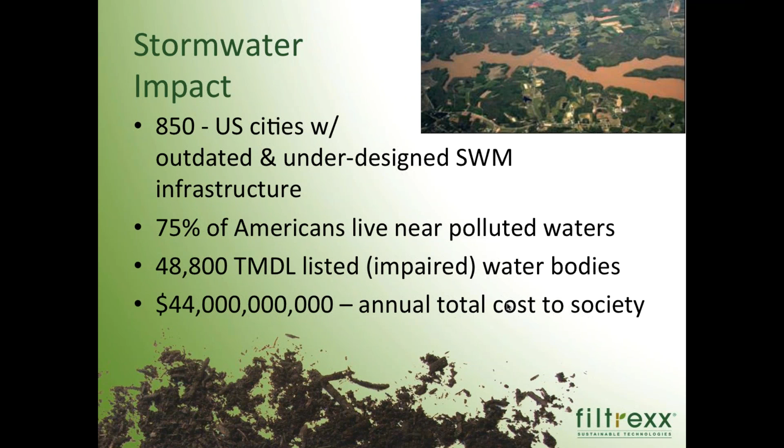According to the U.S. EPA, about 3/4 of all Americans live near a polluted surface water body. If we were to get on their impaired water body list that they maintain on their website, the U.S. EPA, for TMDLs, or total maximum daily load designated water bodies, we'd see that we're actually approaching about 50,000 water body segments distributed across the United States right now. And another study has said that if we were to add up what we pay as a society to clean up our water due to poor or ineffective stormwater management, we pay about $44 billion per year.

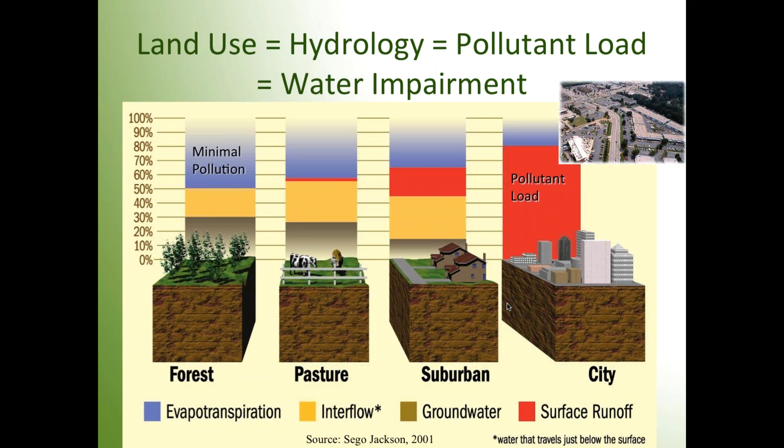And what happens is when we reduce each one of those natural systems in the natural hydrologic cycle, we have more and more surface runoff, and when we have more surface runoff, it carries a lot of pollutants along with it, and you see that here in the graphic. So you can look at the red as more stormwater in these developed watersheds. You can also look at them as more pollution as well, because they are inextricably linked when we have more impervious surface in the watershed.

As I mentioned, the U.S. EPA says that about 3/4 of all Americans live near a polluted water body. If you were to take a deeper dive and a closer look at what they have on their website, these are the top pollutants that they have listed: coliform bacteria, a range of metals. This is copper, cadmium, chromium, nickel, lead, and zinc. Generally, we find most of these coming from our building structures and our roads and parking lots and highways, mostly coming from transportation sectors.

Nutrients, nitrogen and phosphorus, so mostly macronutrients. Fine sediments, the ones that really stay in suspension once they get into a water column, that lead to high turbidity and suspended solids. These are going to be your clays or your fine sediments. And then last but not least, petroleum hydrocarbons. So not only are these the top pollutants that we see listed for impaired water bodies, they're also the top pollutants that we find in our urban and suburban runoff as well.

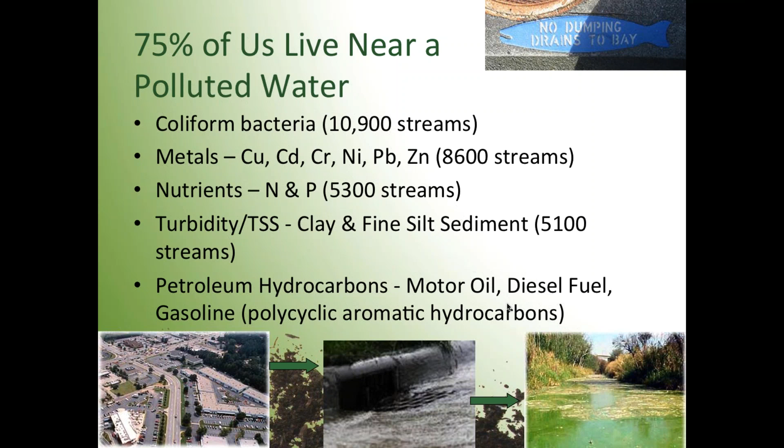So no surprise there that what we find, the pollutants in our stormwater, are the very top pollutants that we find polluting our water bodies. If we look at some of these source areas to figure out where the problem areas are and really what we need to target, as I already mentioned, a lot of the metals are coming from parking lots, highways, streets, and rooftops. We also get a lot of hydrocarbons coming from the same areas minus the rooftops.

Golf courses and lawns are actually the leading sources of nutrients getting into our water bodies, and pet parks, believe it or not, are one of the leading, if not the leading, source of fecal coliform contamination in our urban and suburban areas, stormwater originating from those areas.

Who cares the most, or who's really paying a lot of attention to this? So anybody that has a National Pollutant Discharge Elimination System stormwater permit, okay, that could be a land disturbing activity or a construction site. For most areas in the country, that's anywhere that's disturbing 1 acre or greater, they must have a stormwater permit. Now, generally, they're only targeting sediment in those applications and not some of the other pollutants that I mentioned.

But industrial stormwater permit holders and MS4s, or municipal separate storm sewer system permit holders, often do have to target not only sediment, but also a lot of the other pollutants that I mentioned earlier. And all of these entities, it's very possible, depending on their SIC code and the size of their municipality, that they may have a stormwater permit.

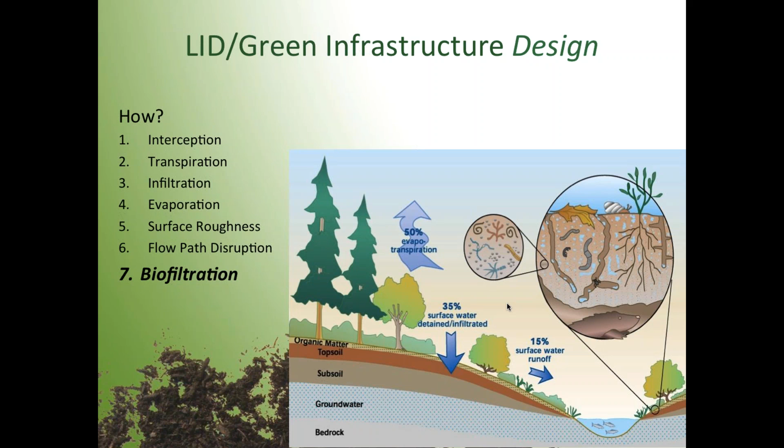We know in land disturbance and through urbanization that surface water runoff number, which is quite low in the graphic here because it's a natural environment, is going to be much higher, and there's going to be pollutants associated with it. So if we can get that natural biofiltration behavior and processes in that flow path, we're not only mimicking nature, but we're actually getting that high performance process in the areas that need it most.

Going a little bit farther into the type of media that we use here. So at Filtrexx, we use compost for all of the products and practices and technologies that we use and develop. I'm going to show you a list here of all the different best management practices that we use in stormwater management, but they all use one of two types of compost. The first one is what we call a filter media, sometimes a biofiltration media. It's specifically designed for optimum filtration of pollutants and also hydraulic flow or passive flow of water through the system.

We don't want to create a dam. We don't want to create an obstruction. We're not relying on just flow restriction and sediment deposition here in order to improve water quality. That's what a straw wattle and a silt fence does. We actually want water to passively move through these systems and filter it. Now, we are restricting flow to a degree because we are putting something in the flow path. Remember that from the LID design, but we are relying on filtration mechanisms as well.

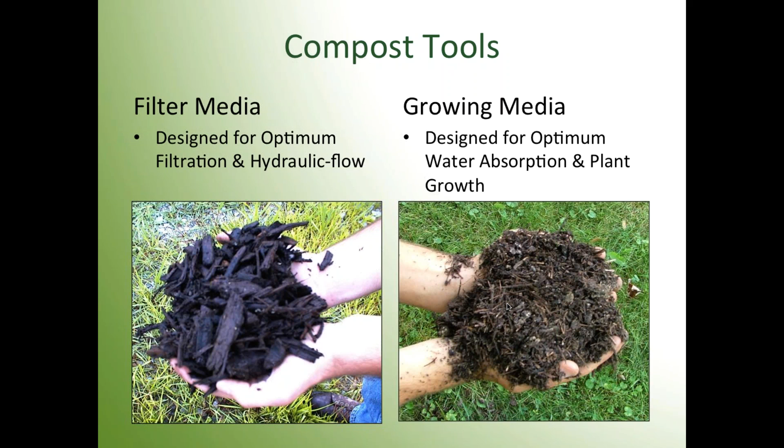So all of these use the filter media. Okay, it's that very coarse media, and you can see a variety of the applications where we're using it, from sediment control to check dam applications, slope interruption devices, sediment traps. We also use this media in bioretention systems and biofiltration systems where we're looking at combining vegetation as well. As an example, if you look at the lower right-hand corner, this is a designed biofiltration system to filter pollutants coming off of a large parking lot.

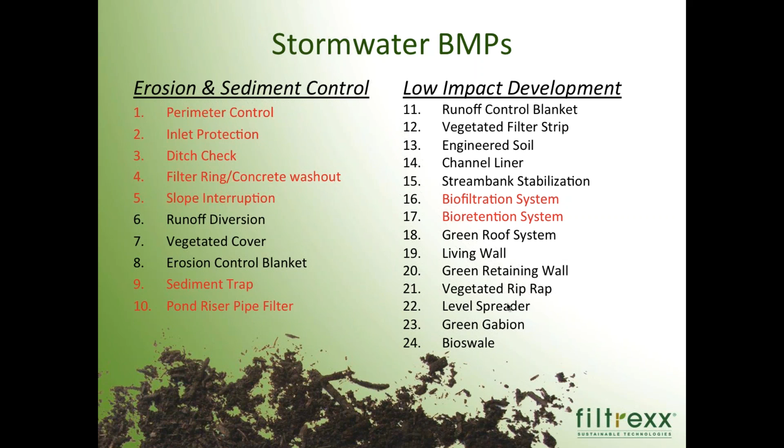I don't spend a lot of time talking about the sock specifications because this is really something you can dig into outside of the webinar. If you've seen our specifications or you're familiar with them, they actually are very detail oriented. If you compare them to other manufacturers or vendors that have specifications on their practices or their technology and their product, you'll notice that ours are extremely long, and that's actually by design.

We look at our specifications also as an educational opportunity, because we realize for a lot of folks, they may be coming to our systems for the first time, or they're trying to understand how it works or why it works or where it works, or what the limitations are, maybe what the inherent advantages are. So it's almost like a one-stop shop of how you use these things and where, just to have a greater understanding, because oftentimes when folks are specifying or engineering or designing with our products, we don't have the opportunity to engage them in a webinar like this, or to have an educational opportunity. So we take that advantage, and then we also have a summarized version as well.

But a couple of the key elements that really make these unique are the different size diameters of the compost filter sock, and you can see here ranging from 8-inch all the way up to 32-inch. We actually even offer a 5-inch diameter filter sock in some limited regional locations. The weight is also one of the unique inherent advantages here, ranging from 13 pounds per linear foot up to about 200 pounds per linear foot.

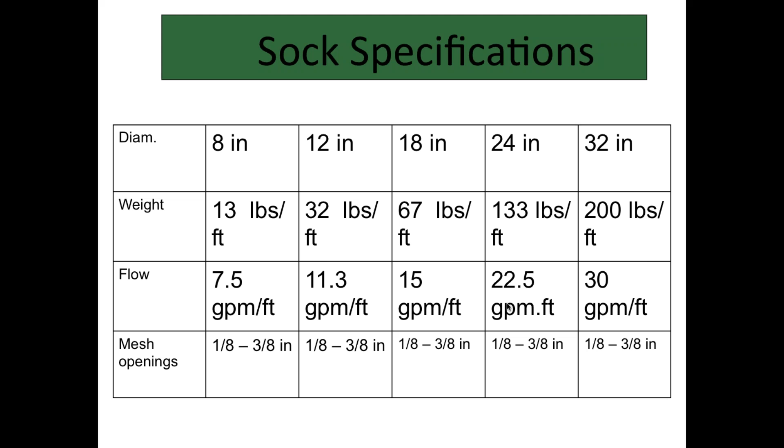There's not a unique performance aspect of the mesh itself, and we don't want it to be. We want the organic material to be the performance mechanism. I've talked a bit about this already in talking about biomimicry, so I'm going to move beyond that. But what I do want to spend a little bit more time talking about is really how and why the compost filter media works the way that it does.

So it's what we really call a three-way filtration system or biofiltration system. There's a physical component here, and actually the physical component just relies on very typical filtration elements and design. There's actually not a lot that's unique here, but the key aspect is using and specifying the right particle sizes, and by doing that we not only allow water to move through the system, but we create these pore spaces to trap a variety of particulates and sediments. And so there's other types of technologies that do this.

You don't want the compost filter media, again, to be too small, because then you're just blocking the flow and everything, and you have very little design capacity through the system, and it actually is not a passive filtration device once you do that, once it becomes just a blocking mechanism, and I'm going to touch on this again in a moment.

What begins to make it really quite unique is the chemical component, and we know that organic matter, and we know that compost, and even specifically humic materials, have the ability to absorb soluble pollutants that are present in stormwater. In fact, US EPA has advocated for many, many years to use compost in polluted soil environments to tie up pollutants in polluted soils, like in brownfields and even Superfund sites, to remediate those soils.

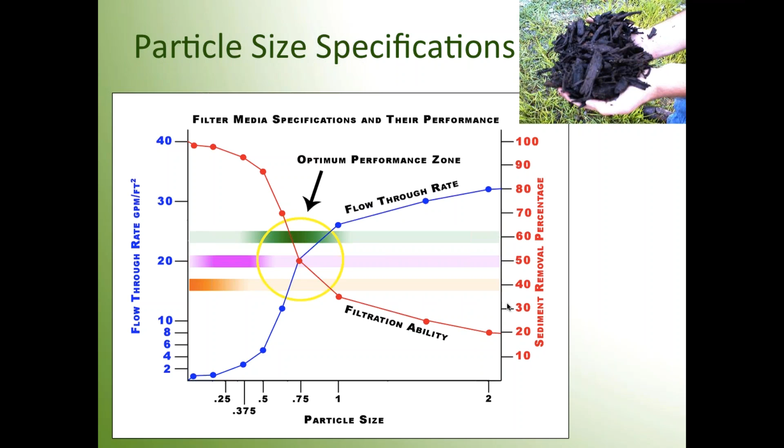That's actually the secondary goal there. The primary goal is to continue to allow the stormwater to get into that drain. So there's a lot of impervious surface here. Presumably there's a lot of traffic and automobiles and truck traffic. The last thing we want to do is to divert runoff away from that storm drain.

It was put there for a purpose, and we don't want to dam up water or create a situation where there's potential hydroplaning and an unsafe environment for traffic and for people, where it can ultimately, unfortunately, lead to property damage or personal injury, and that's the very last thing that anybody wants. So we need to allow that water to continue to get into that drain, and secondarily do a better job than that grate does of keeping particulates and pollutants out.

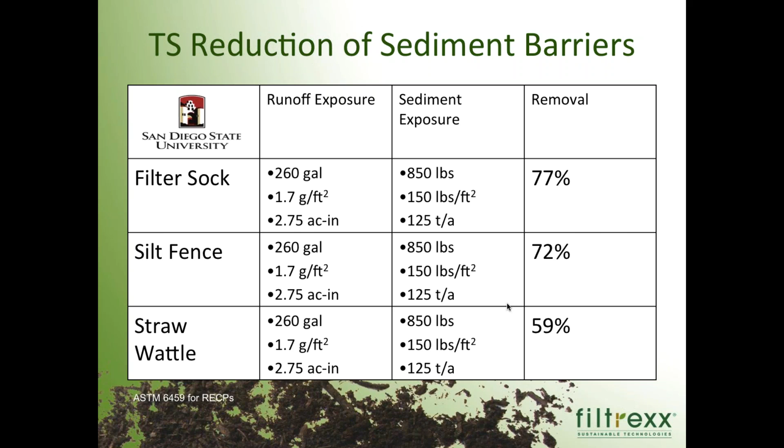This is another study. This has been published in the Journal of Soil and Water Conservation, performed by the University of Georgia, comparing two different diameters of compost FiltrSoxx to a wood chip filter berm and a straw bale. Two things came out of this study. One, the higher performance of the compost FiltrSoxx compared to these other organic practices for sediment control, but also no improvement in going to a larger diameter sock.

So this is a little counterintuitive. I think a lot of folks think if you want more filtration, go to a larger sock, and that's not necessarily the case. What this is showing us is that the main reason to go to a larger device here is just to handle greater drainage area, or more design capacity to handle runoff and accumulation, not necessarily to improve water quality.

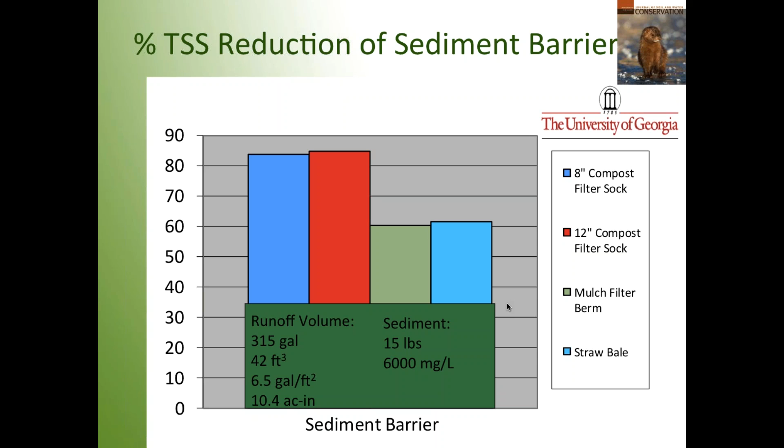So what I've done is shown you 3 studies from 3 major research institutions distributed in different areas around the country using different soil types, which means different sediment types, different methodologies, different rainfall intensities and durations and flow rates, and they're all showing a fairly consistent removal efficiency across these published studies of around 80%, a little bit below, a little bit above.

So I think a trend is developing here where folks are utilizing about the 80% removal efficiency level of sediment and suspended solids for this type of practice, assuming that it's designed correctly and specified correctly. We're seeing that in these studies.

So we partnered with some scientists from the USDA Ag Research Service at their research headquarters outside of Washington, D.C. to further develop the compost FiltrSoxx as a management practice. So to really begin to look at it as not just a sediment control device, which is how it was originally designed and developed, but more as a true biofilter, beginning to target more of these stormwater pollutants that I've been talking about, the soluble fractions of these pollutants.

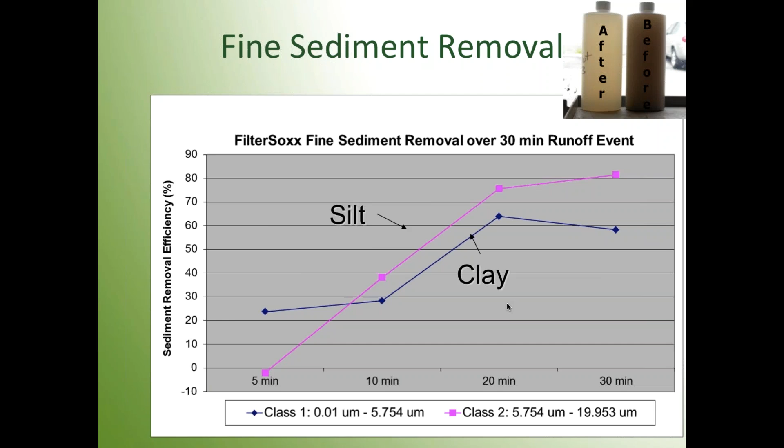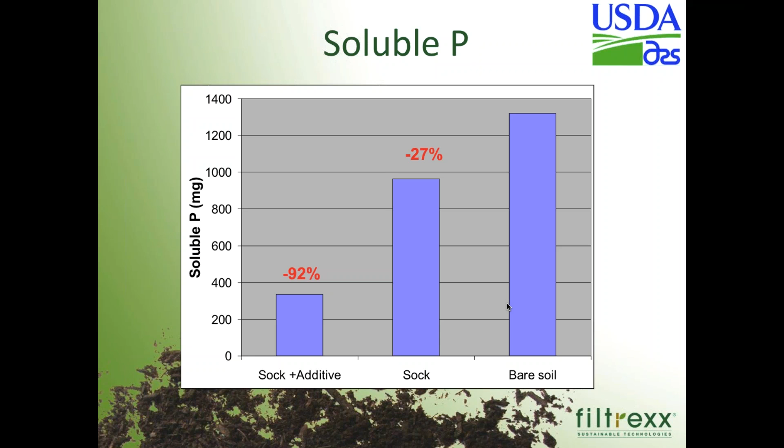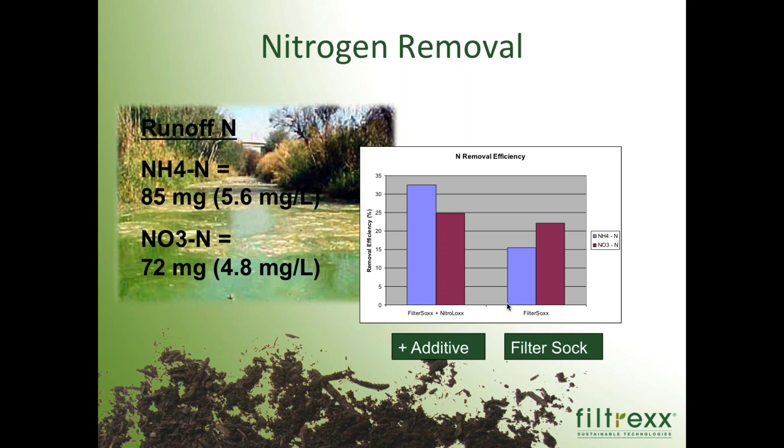Soluble phosphorus, by adding the additive to the EnviroSoxx to target phosphorus, we're actually able to get up to 90%, just over 90% removal efficiency for soluble phosphorus. For nitrogen, in the form of ammonium nitrogen and nitrate nitrogen, we're actually able to get between 25 and nearly 35% removal for both of those soluble forms of nitrogen species. Bacteria, in targeting both E. coli and total coliform, we're actually able to get in the 99th percentile of removal efficiency with the additive in our EnviroSoxx technology.

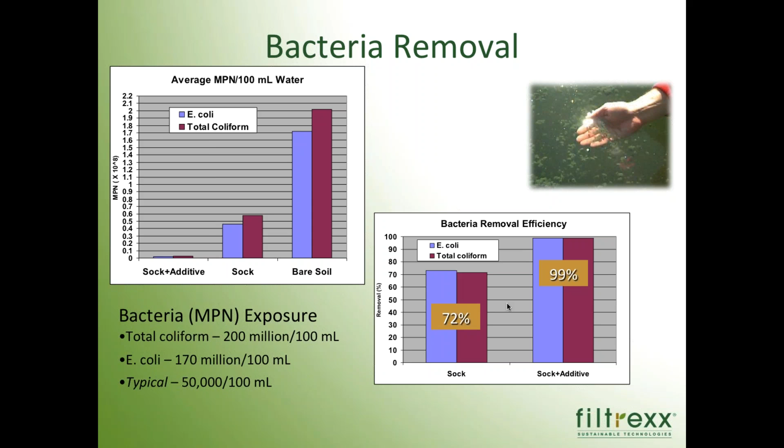So we know there's a pretty long history of scientific published research on how the compost FilterSoxx practice or technology works for removal efficiency of sediment, even fine sediments like suspended solids and turbidity. So we thought that if there was metals that are bound to particulates or sediments, it's probably going to have a pretty decent removal efficiency. But the true worth or value of these biofilters, or any stormwater filter for that matter, is their ability to target the soluble fraction. It's a lot tougher to target these soluble fractions. It takes a lot more in development, and they're a lot more valuable consequently, because that can be the highest percentage form of these particular pollutants.

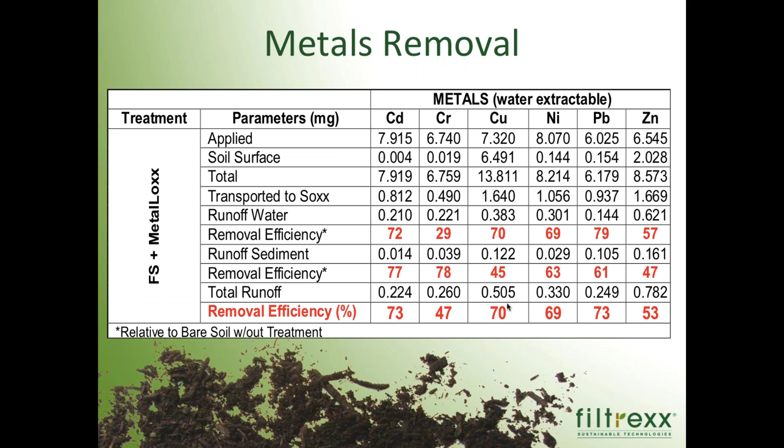So what you're looking at here, I've highlighted in red the soluble versus the sediment bound, and then the total. So if you're just interested in the total removal efficiency, that's the bottom row there, starting with 73% for cadmium, moving across to 53% for zinc. The soluble fraction is the top row in red, starting at 72% for cadmium, ending in 57% for zinc, and then just the sediment bound fraction is at 77%, you see there. So pretty unique here, and it's important when you evaluate these types of practices and technologies to really separate this out and to look at the soluble removal efficiencies for the pollutants.

We found that the EnviroSoxx and compost FilterSoxx practice works really well for petroleum hydrocarbon removal. We see in the 99th percentile for motor oil and diesel fuel removal. We actually even tested it for gasoline, and we're about 55%, almost 60% removal efficiency for gasoline, although in all honesty,

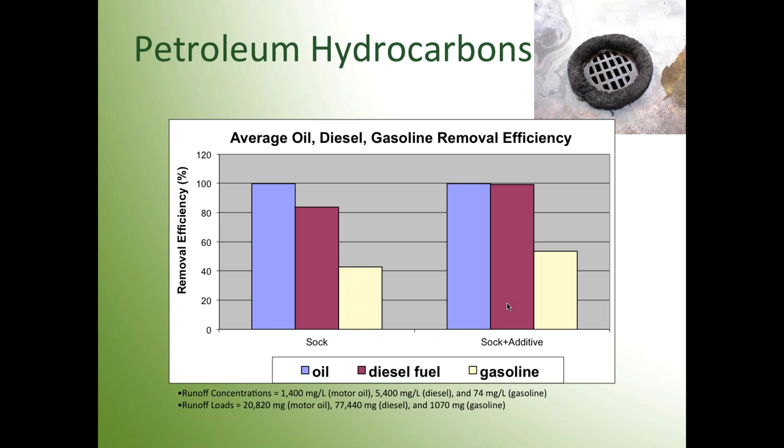although I have a picture here with some gasoline sheen in stormwater, gasoline often evaporates pretty quickly once it hits an impervious surface. So unless you have a spill or a puddling effect during a stormwater event, it's usually not as much of an issue as these other two that are more viscous and usually stick around for quite some time.

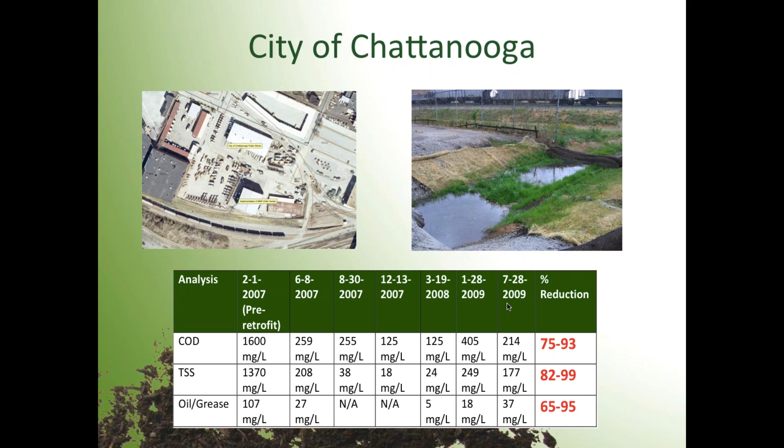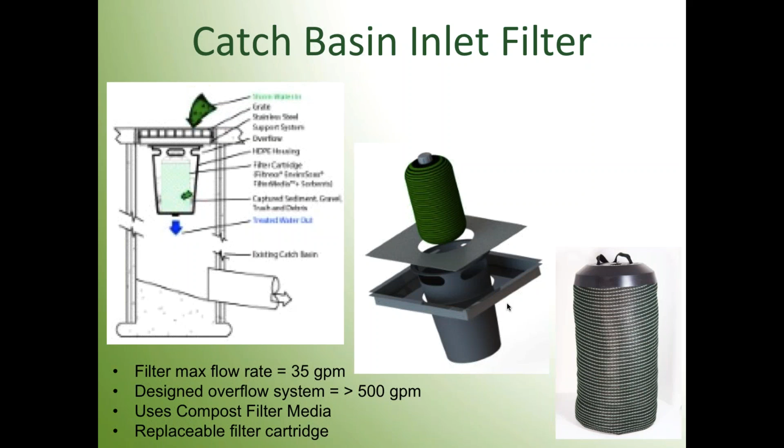Last but not least, I just want to touch on one of the key elements of why so many folks have become very interested in Filtrexx and the practices, technologies and systems we use, and it's because all of our systems really do rely on biomimicry. That's really at the center of our technologies and our design thinking when we develop new products and implement them into the environment.

We truly call them a sustainable BMP or a sustainable best management practice. You may have heard some of us use this terminology. It uses 100% recycled material, which is compost.

It's biologically based organic material, so we rely very little to none, depending on the practice, on petroleum-based materials and products. It's often locally manufactured. This is one of the great sustainability stories of using compost. The U.S. Composting Council has said that there's over 4,000 composting facilities distributed across the United States.

So as long as the compost material is well composted and meets specification, this type of material can be procured in a lot of different places. And if you're getting it locally, not only are you supporting a local business, but you're reducing transportation costs, and you're actually using recycled materials that are most likely adapted to the bioregion in which they're recycled. So you're actually kind of closing the loop at a community scale, and you're really following natural principles and ecological practices and food web principles when you do that.